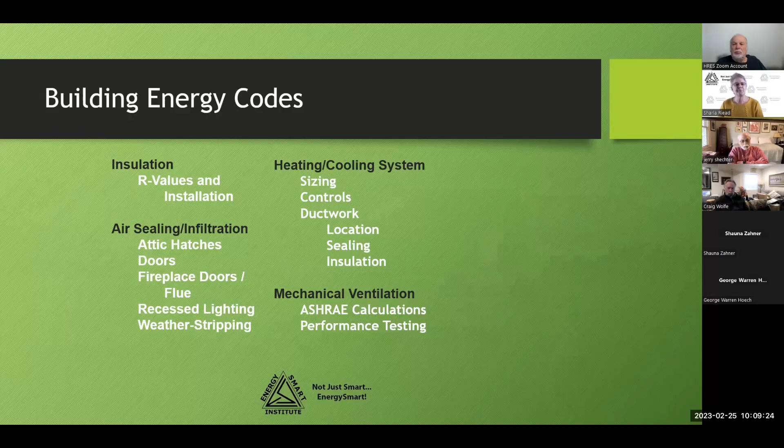The energy code also focuses on the systems: heating, cooling, and ventilation systems, as well as water heating systems. It focuses on lighting, windows, doors and skylights—our fenestrations—and a bunch of other miscellaneous stuff like water pipe insulation, snow melt systems, pools, sunrooms. Anything that uses energy or loses energy is going to be in the energy codes.

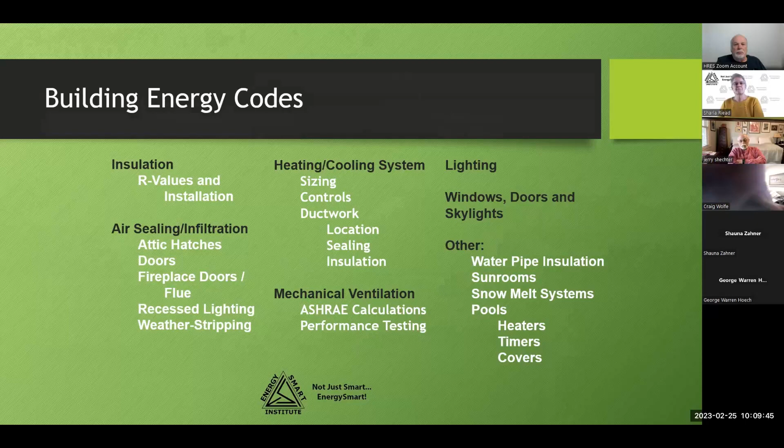So there are what are called paths to code compliance. Our first question that we ask is, does the project even have to comply with the energy code? A lot of jurisdictions in Missouri, and actually around the country, did not have energy codes for a long time.

They just wrote those out of the codes and didn't pay attention to them. But during the Obama administration, any jurisdiction that accepted ARRA funds, the American Recovery and Reinvestment Act funds, part of the requirements of accepting those funds was to adopt an energy code. So now a lot of places have adopted energy codes that didn't used to have them. So now we say, yes, most of our projects in the state of Missouri do have to comply with the energy code, and definitely in the Kansas City area.

And then we have a path called a prescriptive path that you see there on the left. And that's basically, you get a bunch of tables in the code that say, here's your minimums that you have to meet. And it's either a pass fail. You meet it or you don't meet it. You meet this R value or you don't meet it.

And then there's another path called the performance path, which has historically been listed in the International Energy Conservation Code, the IECC. And that's where a builder can prove that they are saving just as much energy on their walls and windows and attic and floors as they would if they followed the prescriptive path by showing how much it would cost. They'd have to simulate the performance using a computer and show how much the energy costs are. And if they're lower than the prescriptive path, then it's deemed as in compliance. So they document that compliance to get their plan review. And then there's testing and inspections that happen before they get their final certificate of occupancy to make sure that they do that.

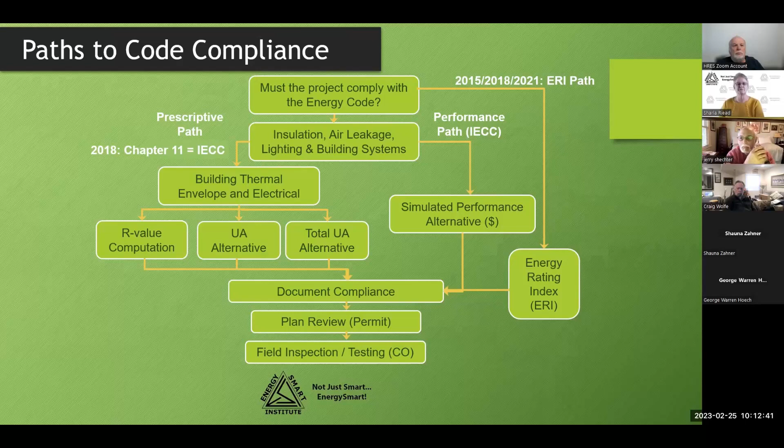So basically, your prescriptive path means that you meet all the minimum required levels, that you have followed those tables and you have met those requirements. In the performance path, you get credit for testing the infiltration, so your air leakage in the house, the duct leakage, and mechanical ventilation efficiency. So if you can offset some of the insulation requirements by having tighter ducts or a tighter house, then you could prove compliance and you got credit for those things.

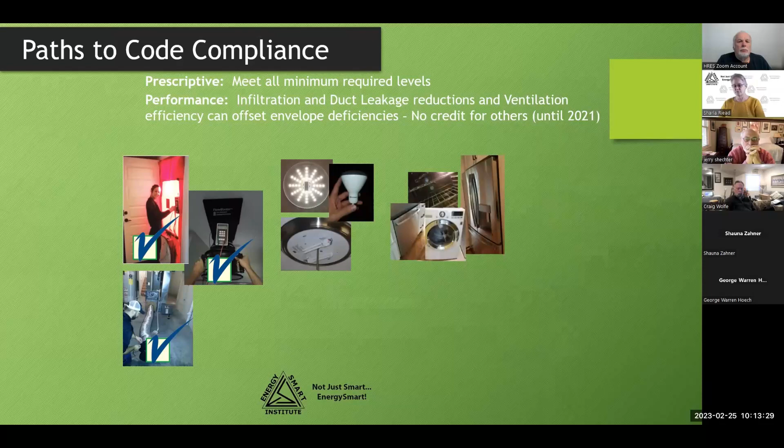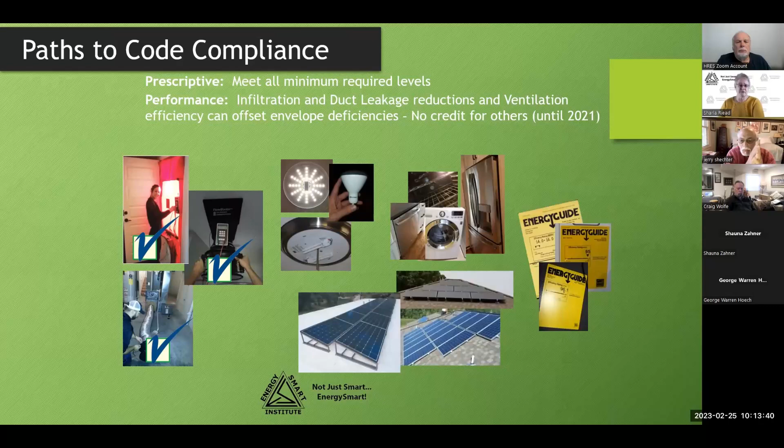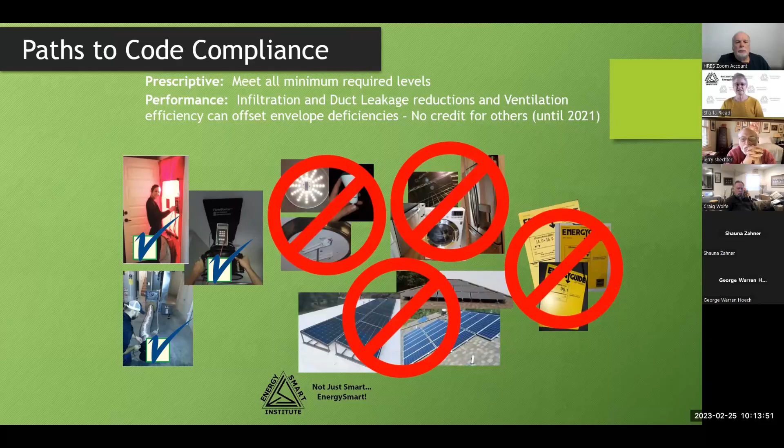But what if the builder put in energy efficient lighting or really energy efficient appliances in the house, or equipment, heating and cooling equipment that's very energy efficient, or solar on the house, which is going to save you some energy dollars because you're going to be generating your own energy. Well, none of that is taken into account in either the prescriptive or the performance path. So that's precisely why the Energy Rating Index path was put in place, because it looks at all of the items in the house as a system. All those interactions are evaluated, and the overall energy usage of the entire structure and all the items in the structure is taken a look at and determined how much energy you're actually using.

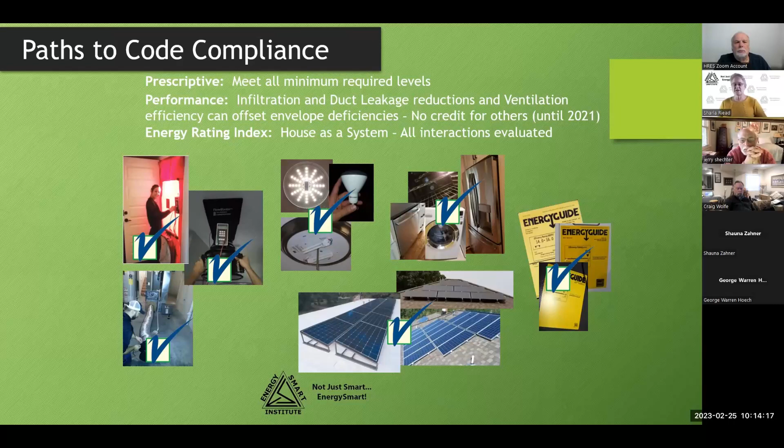So now you can get credit for all of these items. And it was actually a request of the builders to put in a path that gave them credit for what they were doing. So you can see

complying with the energy code, there's lots of ways that it can be done. There's actually, under the prescriptive compliance, there's actually 3 different paths because one of them is you can use your U factor, which is looking at the energy efficiency of an entire assembly rather than just the amount of insulation in it. It takes into account insulation, wood or metal, whatever your studs are made of, the siding, the air film. It takes into account everything.

It's mostly used for windows because it takes into account the windows, any window film, the frame, any spacing in the frame that helps stop heat transfer. And so a U value is the inverse of an R value. It's basically, so it's 1 over R equals U, and 1 over U equals R.

So as your R value goes up and you become more resistant to heat flow, your U value is going to go down. So what we want is a high R value and a low U value. You can actually prove compliance in the codes using either the U value or the R value.

Or the next one is the total UA, which is looking at the U value of the entire envelope, rather than just walls or windows or doors or floors or ceilings. You're looking at the entire envelope and saying altogether all of this meets the requirements.

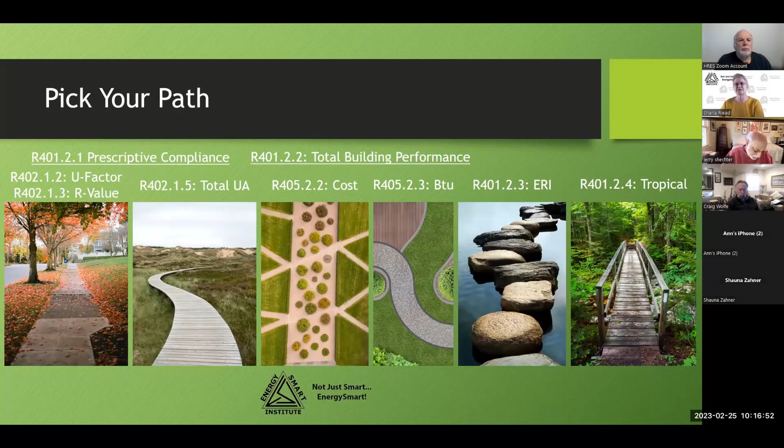Starting in July of this year, there's going to be an enforcement of the 2021 codes, unamended. So that's a big jump. We're probably at about 70% efficiency between the 2009 and 2012 code, and we're going to go down to about 29-30% more efficient. It's a big jump, and it's going to help quite a bit.

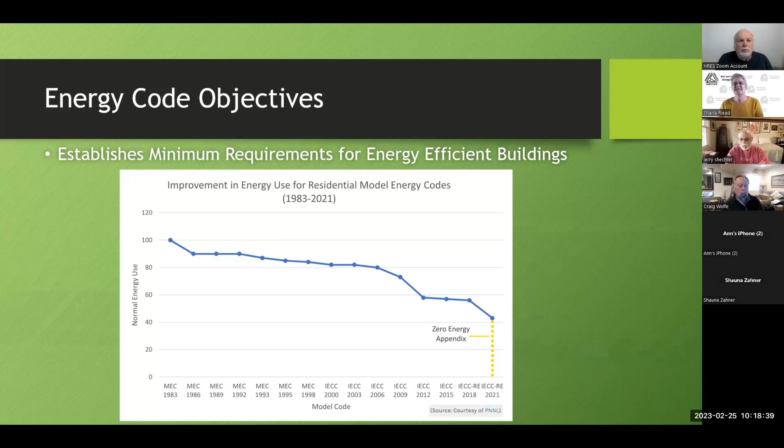So the energy code objectives are obviously to save energy, but there are more objectives that result from energy codes. They do result in healthier buildings because we're having cleaner combustion, better ventilation. The codes require mechanical ventilation, and poorly sealed building envelopes can allow pests, excess moisture, air pollution, and other stressors that can cause or exacerbate health problems. By having a good, tight envelope and an energy efficient building with good mechanical ventilation, you're reducing indoor air pollution and decreasing the incidence of asthma, allergies, lung cancer, COPD, and other illnesses. So energy codes also result in healthier buildings.

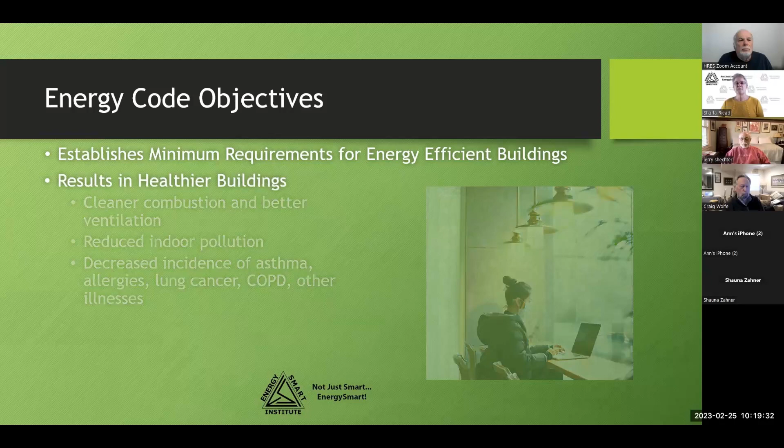They also work on building durability. If you have a good tight envelope that's been verified, then you're going to have less air and moisture intrusion, less pest intrusion. Fire safety is always required in a building, but it gets double checked when you're checking for energy efficiency as well, because the energy verifier is really focused on that envelope. There's been several instances in my experience where I've found places that weren't sealed properly for fire protection, and they had to come back and seal it to make it safe.

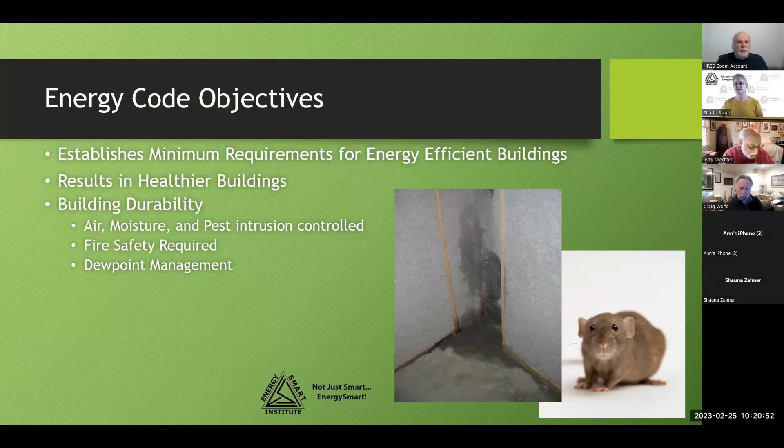With energy efficiency, we strive to manage the dew point, because moisture is the enemy of buildings. Joe Lstiburek, a gentleman who does a lot of energy presentations, likes to say that what we build today are self-composting houses. We allow too much moisture in the house and then it falls apart. So with energy efficiency, we have more durable buildings. There are actually home insurance companies that will provide a lower insurance rate to homes that are verified as more energy efficient. They also focus on building resiliency.

You're going to see a term a lot more often now called passive survivability, because we're seeing a lot more natural events happen, tornadoes and fires and droughts and floods. If a house is well constructed and tight, we can actually survive in the house a lot longer if our energy goes out, or if we lose access to heating and cooling. So it increases passive survivability, the ability to stay in your home even when you don't have active heating and cooling and active energy, electricity.

It lowers the demand on the grid, which you're going to hear a lot more about these days, because we're trying to make it better across the whole country, make it where it's not so prone to being attacked, and where it can handle the increase in demand as people move more toward electric. So lowering the grid demand with an energy efficient house, and lowering exposure to event-driven price spikes.

If your house is very energy efficient, then things like having your utility bills spike, like what happened in Texas where they had the ice storm and then all of a sudden everybody's utility bills went crazy - if you're not using all that energy, you don't have to pay that much for it. So it helps lower that exposure.

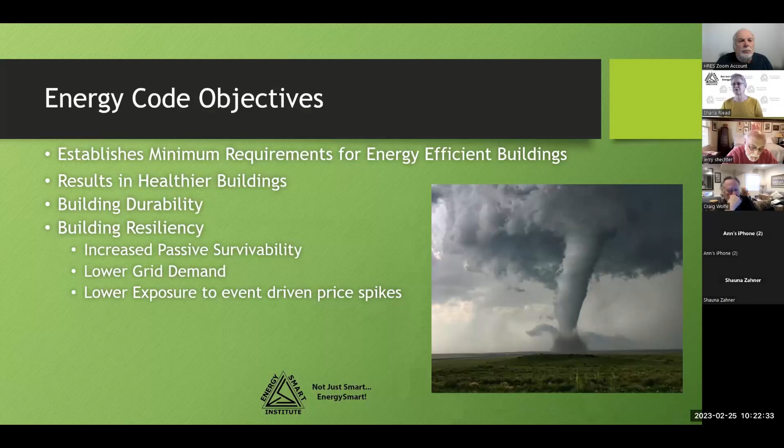One more item here, energy equity. Energy codes are focused also on energy equity. There's been studies that show that each additional dollar invested in energy efficiency avoids more than two dollars on energy supply spending. So saving energy saves money for the people in the house as well as the supply chain portion of it.

It strengthens financial security of families, because studies have also shown that your second highest bill after your mortgage is your utility payments, your energy payments. So if you can lower those energy payments, you can afford a bigger mortgage, or you can actually pay your mortgage because you don't have to spend so much on your energy bills. It also helps with healthcare costs because the houses are more healthy.

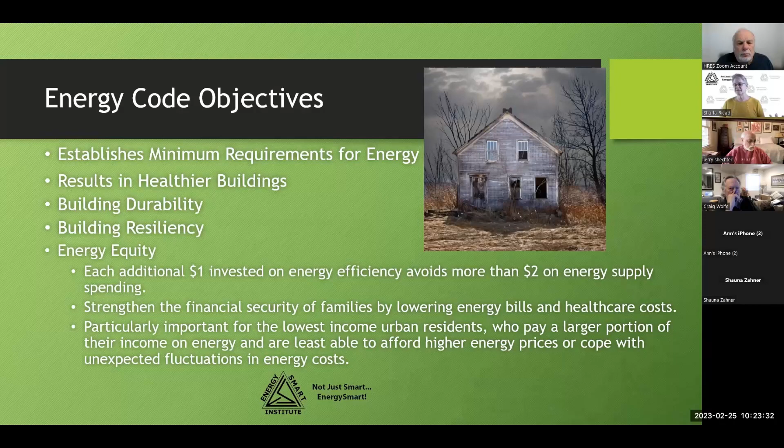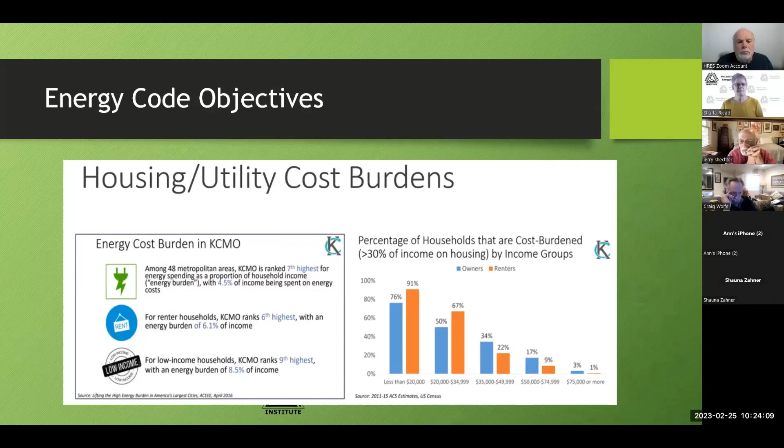So what is the new Kansas City, Missouri Energy Code? Well, as I said, Kansas City, Missouri has adopted the 2021 IECC, the latest and greatest energy code. What this means is that there are increases in R values expected, or decreases in U values, which we talked about before.

There's also a requirement now in the new code that the R value mark has to be readily observable, or the insulator has to provide a certificate. You would think that that'd be something they'd already do, but it was found that it needed to be put in the codes because there's a lot of blown insulation, and the insulators are not standing behind the R value of the insulation they're blowing in.

Now they have to provide a certificate that says, here's how much R value I put in. There's been a new definition for what is air impermeable insulation, because a lot of insulations were claiming to be air barriers as well as insulation. Now that's been scientifically determined and added into the codes - what actually constitutes an air barrier versus insulation, and what insulation can be considered an air barrier.

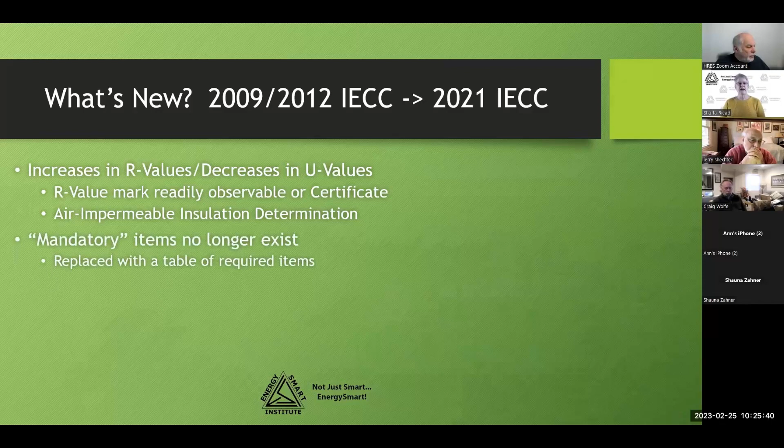The old codes had a term called mandatory, and for mandatory items, every path - we talked about those different paths - each path that was taken had to follow all the mandatory items, even if they weren't following a prescriptive path, they were following a performance path, there was still items in the prescriptive path that were required to be done. However, it was confusing for some people. They didn't go backwards and look at all those items. So a lot of the mandatory items were being missed and not actually being implemented.

So now in the codes, they simplified it by just making a table of required items at the beginning of each of these path descriptions that says, if you're following this path, you must complete these items. So the mandatory items are still there, but there's going to be a much higher probability that they will all be completed.

There are additional energy efficiency requirements for all of those paths. They've also included solar ready and zero energy provisions in an appendix. I'm going to go over those, and I know that's of most interest to this group.

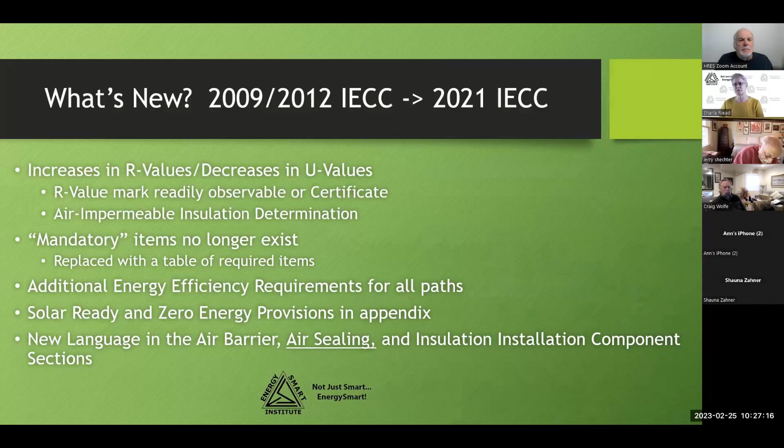There's new language in the air barrier, air sealing, and insulation installation component sections. There was a lot of focus before on insulation values, but not a lot on air sealing and what needed to be air sealed. Now there's more focus on that, because it's highly important for your home to function correctly that it be air sealed as well as properly insulated.

The maximum air leakage rate is now put in place for all compliance paths. As I said before, you got credit for air infiltration on the performance and ERI paths, but when those were measured, there was no requirement for how tight the envelope had to be. It is what it is, and it fits into the formula of how much energy you're using. But now in the 2021 code, you can't go more than 5 air changes per hour, no matter what path you use—you can't have a really leaky house.

The ducts have to be tested as well to see how leaky your ducts are, regardless of what location they're in. There used to be an exception if all the ducts were inside the envelope, inside the house, but now they have to be tested no matter where they are.

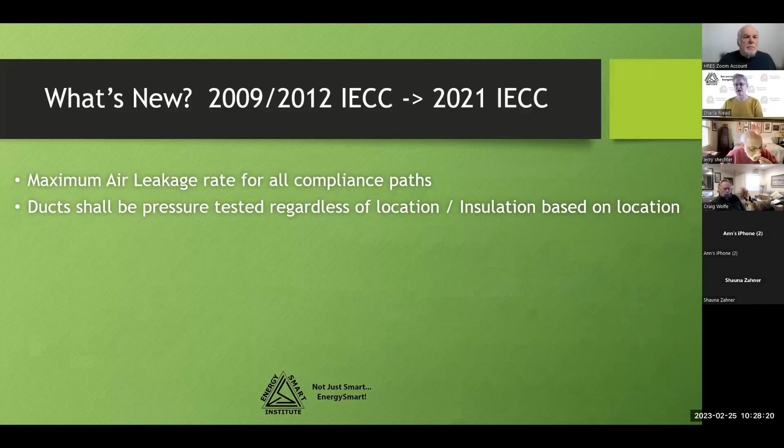Insulation for ducts changed based on which location they're in. There are eave baffle requirements in the attic to keep insulation in place on the edges, and there are attic hatch design requirements, which weren't in there before.

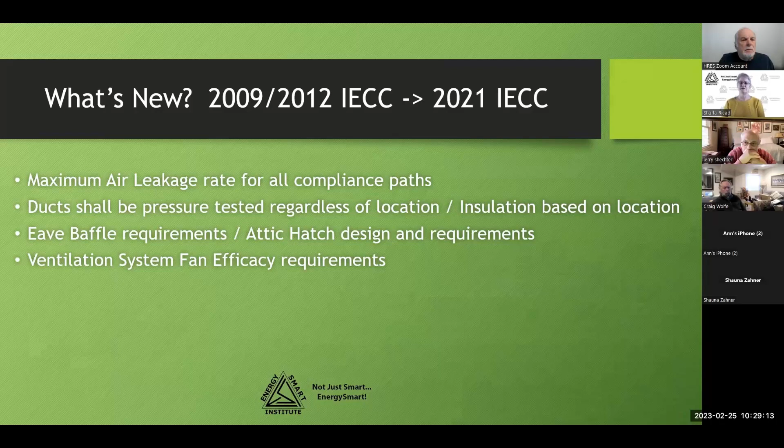Ventilation system fan efficacy requirements: when mechanical ventilation was written into the code, back in 2009 or 2012, it was required for all paths. A lot of ingenuity went into deciding how to incorporate mechanical ventilation into our homes, and some of those methods ended up using fans that used a lot of energy, really impacting the energy use of the building. So now ventilation system fans have requirements for how efficient they have to be.

Lighting has changed too. They changed the definition of lighting efficacy because now, instead of just incandescent and compact fluorescent lights, we have LED lights—more and more efficient lights. So they changed the definition of lighting efficacy and are requiring 100% high efficacy lights be put in, as well as some controls. We'll get into a little more detail on that.

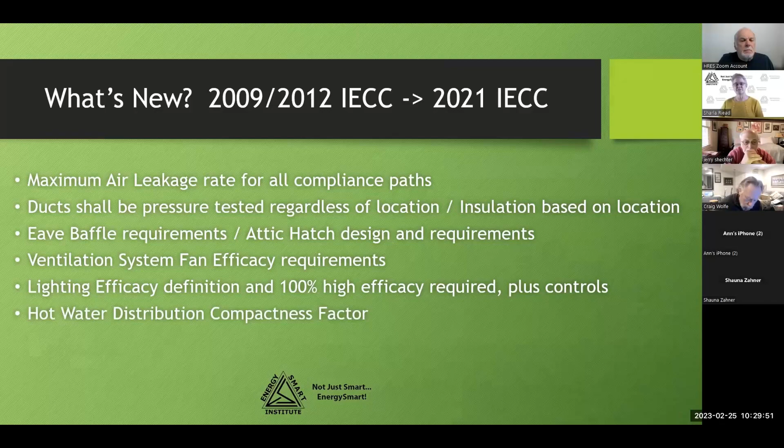There's also a new hot water distribution compactness factor. I'll show you some more about that too. So what are these changes?

This is the U factor and R value changes for our region. You can see in the green parentheses what's in the code today in Kansas City, Missouri—that's what's required right now. The black numbers are what's coming in 2021. If there is no green, then they didn't change for 2021; it's the same as it was.

One of the biggies here: the ceiling R value. Currently we require R49 in the Kansas City area. It's going up to R60.

Wood frame walls currently require R13. That's increasing to require R20 continuous, or R13 in the cavity plus R10 continuous, or R30 in the cavity, or R20 plus R5 continuous.

These are all prescriptive path items, so this is just that one path. If a builder wants to follow one of the other paths—the performance path or the ERI path—they can continue to put in R13 walls, as long as they can prove they're saving enough energy somewhere else to make up for that. So it's only a requirement under the prescriptive path.

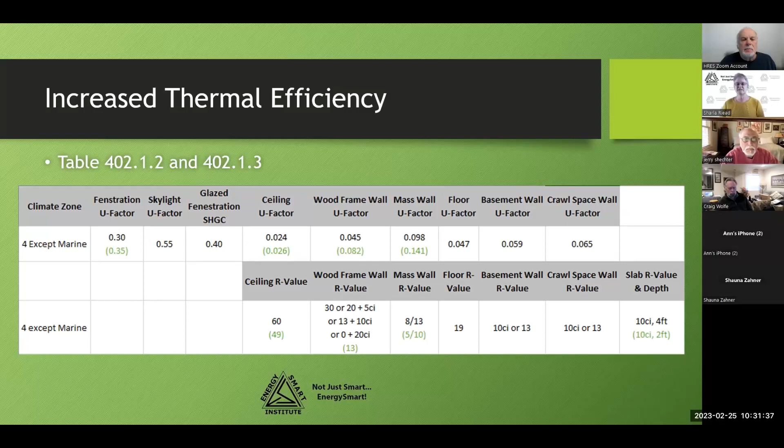Our mass wall R values—your concrete walls, your foundation walls—changed a little bit, increased slightly. And the slab insulation depth: they added 2 more feet to the slab insulation depth, because you can lose a lot of heat out of your slab if it's not insulated deep enough or under far enough. So obviously, increased thermal efficiency.

The big one that builders are complaining about is the R49 to R60 insulation in the attic. Now, the code does say you can have R49 in the attic, and that qualifies as long as it is full height and goes all the way over the top plates at the eaves.

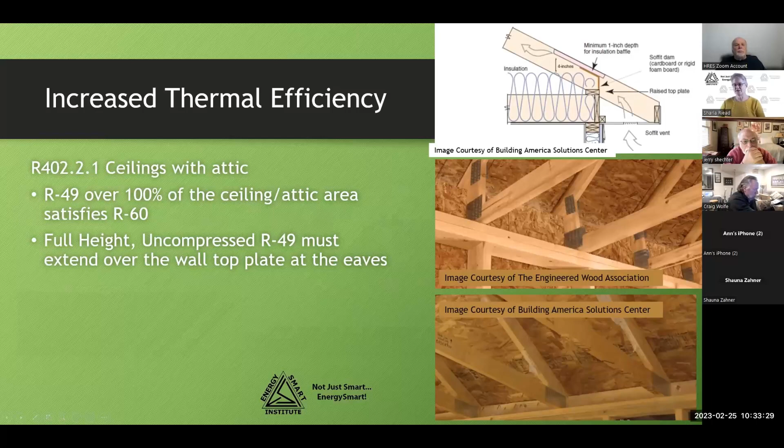So what the code is trying to promote is this kind of wall, called a raised heel truss. Instead of that little point coming all the way down, the roof has been raised up a little and blocking's been put in. So now that R49 insulation can extend all the way out over the outside edge of your wall, and we can still do R49 — it just has to extend all the way out to the outside of the structure.

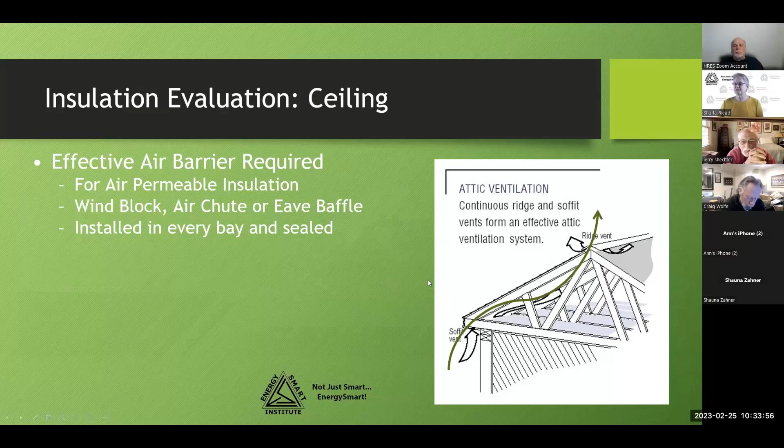Now, the other thing that has raised a lot of concern is having an effective air barrier in the attic, which is a wind block or air chute or eave baffle installed in every bay and sealed. You can see here the air coming in, going up over the insulation and out the ridge vent. It needs to be in every bay and sealed because of a phenomena called wind washing.

Wind washing is where the air comes in through the soffit vent and pushes the insulation away from the edge of the house. This is an infrared image showing that phenomena, where the wind has pushed the insulation away. So now there's no insulation in these blue areas.

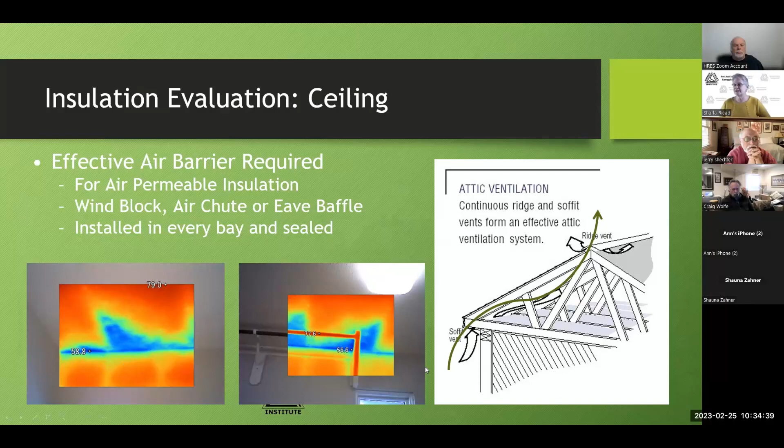This house does not even yet have its certificate of occupancy. That wind washing was done just within a day or two after the insulation was installed. So from the time this house gets purchased, it's not going to have any insulation over the outside edge. That's why this is important.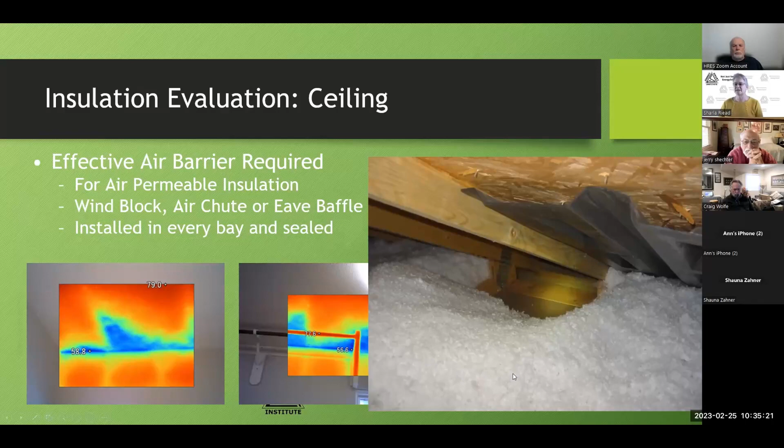The air is coming up and over. However, air is not going to pay attention to that and say, oh, there's a baffle, I have to go that way. It takes the path of least resistance, which is exactly what happened here, as it goes sideways through the soffit and comes out this area where there is no baffle and just pushes the insulation away. That's why you get these marks here.

I've got one more that's interesting. Here's one that pushed the insulation away from a huge area — there was 16 to 18 inches of insulation right here. The next day, this is what it looked like, and you can see all the insulation blew over to the side, filling it up all over on the side and behind it.

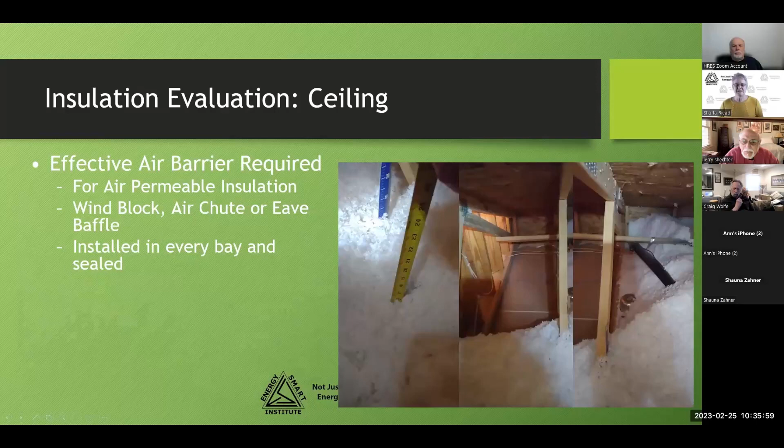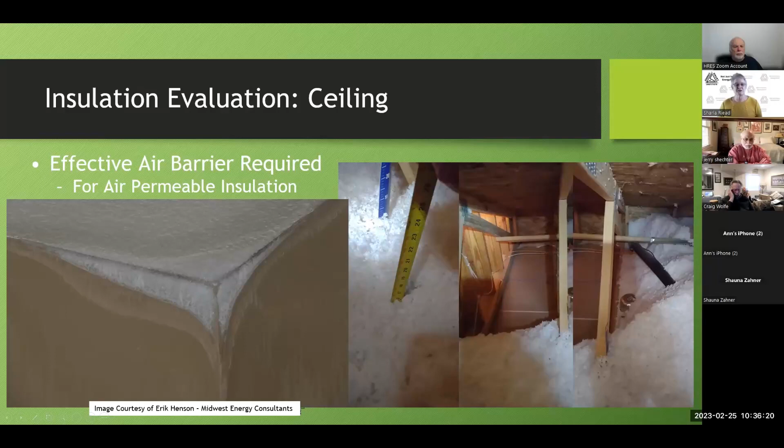So the insulators came back and said, okay, we'll just add more insulation. They added more, and the day after, it was empty again. So we really have to block the insulation from being blown away. Otherwise, on the inside, here's what you can end up expecting. This is a house in Kansas City that had wind washing, ending up with ice and moisture coming down in the corner where the insulation had blown away from the wall. So there's a building durability issue for you right there.

Okay, the air sealing in the new codes includes air sealing rim joists, which wasn't there before, slab foundations. We have to air seal all of these areas, the shafts, penetrations, and shafts and penetrations.

There's added insulation requirements. Narrow cavities are now being addressed in the codes, which they weren't before, so that we're air sealing these cavities. It used to just be that the insulators would poke a bunch of air impermeable or air permeable insulation into those cavities, which did not seal them and did not insulate them very well.

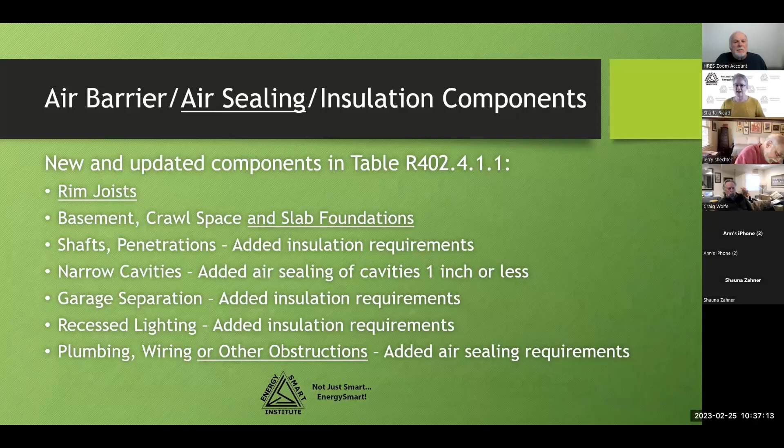Any garage separation, recessed lighting, and then plumbing, wiring, and other obstructions, air sealing requirements were added. And that's because of this phenomenon where we have interior walls that are leaking a bunch of air from the attic. These were taken just a couple days ago.

This is air coming down through that top plate, and here's the hallway, the interior hallway. All this cold air from the attic coming in through holes for plumbing and wiring and shafts and penetrations that are in the inside walls. Your inside walls become outside walls if they're connected to the attic with holes and penetrations. So those all have to be air sealed.

The new code has much more definition and requirements on air sealing to make sure this kind of thing doesn't happen. In this one, you can see the wall is 45 degrees up here at the top, and it's 60 degrees down below. The house temperature is set to 70 something, so those people are very uncomfortable because their walls are all cold.

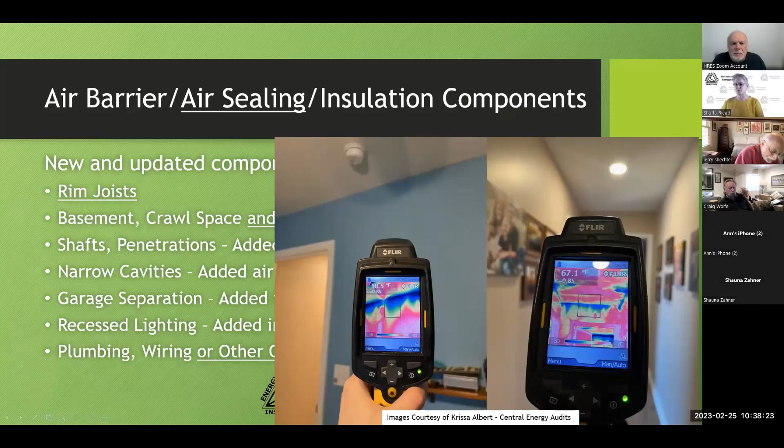Air leakage updated itself a little bit so that there's a maximum air leakage of 5 air changes per hour, but also added some additional ways of calculating the air leakage that's allowed, and provided exceptions for attached buildings because they have sides or tops and bottoms that are against conditioned space, or smaller buildings, because there was some inequity in the amount of air leakage that was truly required or truly allowed in large buildings versus small buildings with the calculations. So there was some of those added.

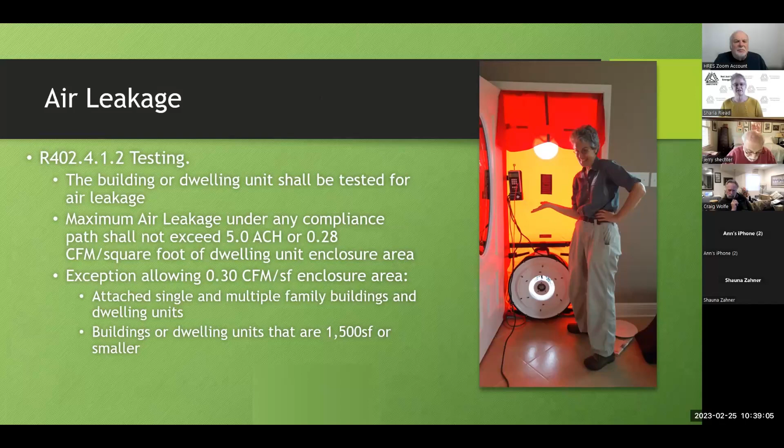The prescriptive path requires an air changes per hour of 3 or less in our climate zone. The other paths can go up to 5, but 3 or less on the prescriptive path.

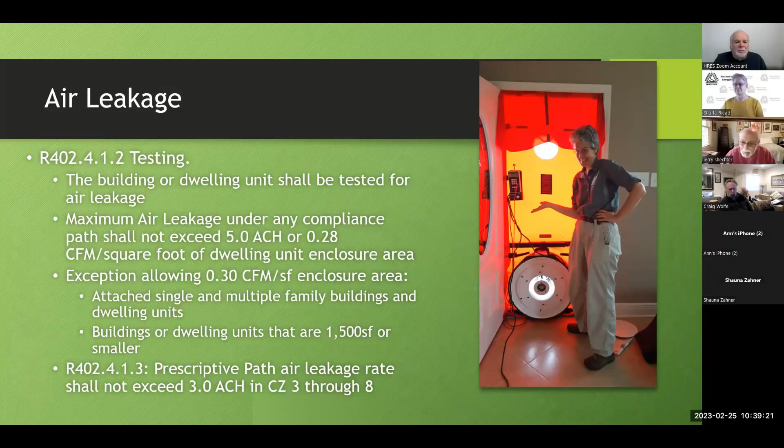Ducts. There's more definition for ducts and where they need to be insulated. Any ducts outside conditioned space, the insulation moved from R6 to R8 for larger ducts and R6 for smaller ducts, and includes all unconditioned spaces, not just attics.

Any ducts located in floor cavities that are over unconditioned space, so that bonus room above the garage, they have to now have a continuous air and thermal barrier on the garage side or on the unconditioned side. Then it has to have a minimum of R19, separating the ducts from unconditioned space.

Because if your ducts get cold in the winter or hot in the summer, now that air that's supposed to be conditioned running through them is cooling down in the wintertime or heating up in the summertime, and you're losing all that good conditioning that you had.

Any ductwork in exterior walls also has requirements now to have at least R10, separating it from the unconditioned space. The remainder of the cavity must be fully insulated, and it must have a continuous air thermal barrier on the unconditioned side.

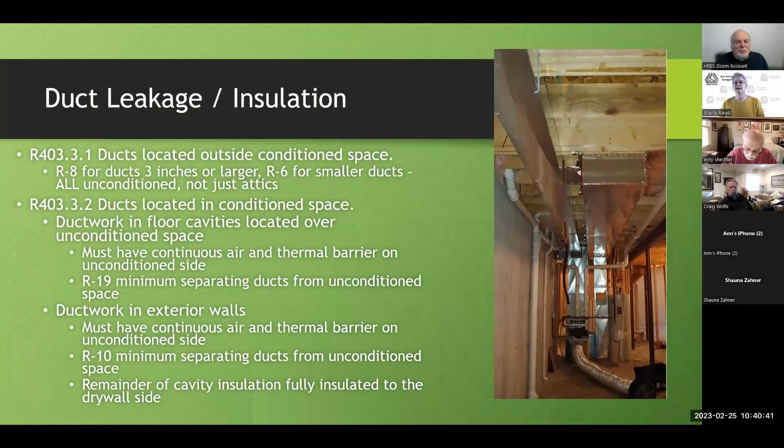Ducts have to be tested for leakage. There's no more exception for ducts or air handlers that are fully within the building envelope. The test has to be written and signed and provided to the code official. Now there's several categories of duct leakage allowed depending on when the test is performed and where the ducts are located. There is an allowance for a higher level of duct leakage if all the ducts and the air handler are entirely within the building thermal envelope and no building cavities have been used as ductwork.

As building cavities used as ductwork tend to leak like crazy. They're very hard to seal. All the parts of it are made of different materials that expand and contract at different rates, and so they don't stay sealed over time.

So this is trying to promote the use of hard ductwork all in conditioned space. We have lots of methods of doing that now. It's just inertia that's keeping us from actually doing these things, because everybody's used to building them and putting the ducts in the attic or in a crawl space or under the slab instead of in the conditioned space.

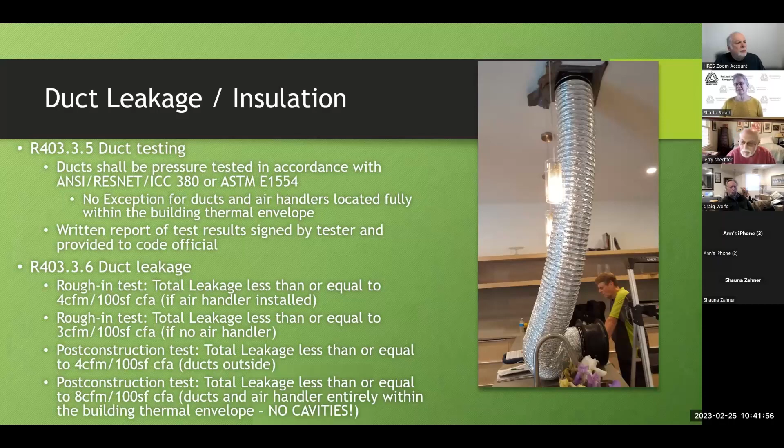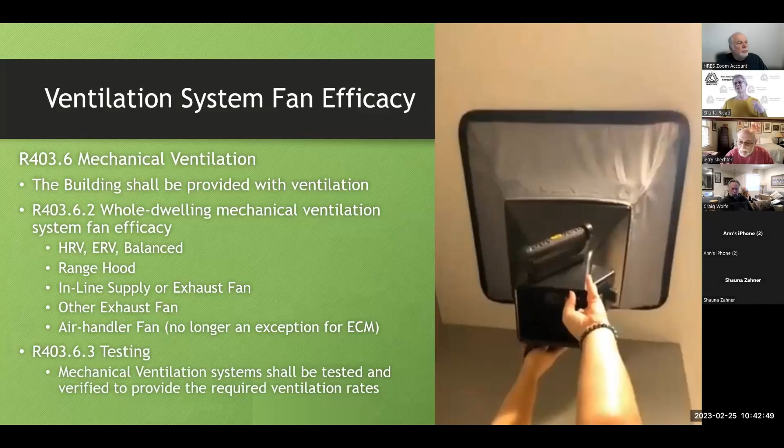There's not an exception for an electronically commutated motor anymore, which was one exception for the air handler fan. But now there's just straight efficiency requirements for those fans. And all mechanical systems have to be tested to make sure that we're actually getting that ventilation airflow that you're supposed to have, that good fresh air in your house.

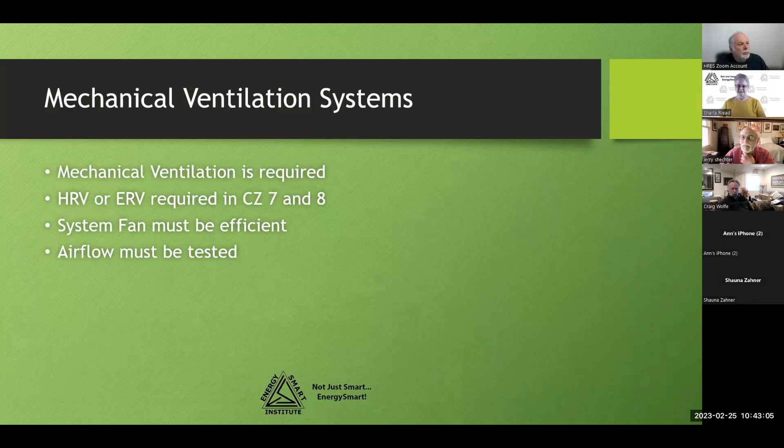Ventilation systems are required. The code actually went so far this time around to require HRVs or ERVs in climate zone 7 and 8. The system fan has to be efficient and the airflow has to be tested.

Best practice for our climate zone, which is 4 and 5 - 7 and 8 are up and far north as you can go, we're in 4 and 5. Actually, Kansas City's in climate zone 4, and 5 is the far north area of Missouri.

An HRV is a good choice for our climate zone because we have dry winters and humid summers, and an HRV will help transfer the heat content of the air so that your exhausting warm air in the wintertime is warming up the cold, dry air that's coming in, and the exhausting cold air in the summertime is cooling down the hot air that's coming in.

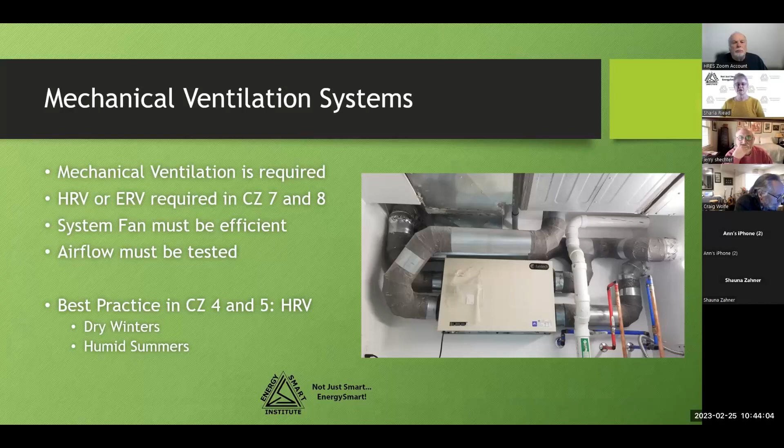An ERV will also transfer that moisture, so it will actually add some humidity in the winter and remove humidity in the summer. So an HRV or an ERV are good choices, but an HRV works fine in our climate.

There's also some changes to the water heating systems. There are so many different water heating systems in use in a house anymore that the codes had to update, and some of the main things they're seeing is that a lot of our homeowners are putting in

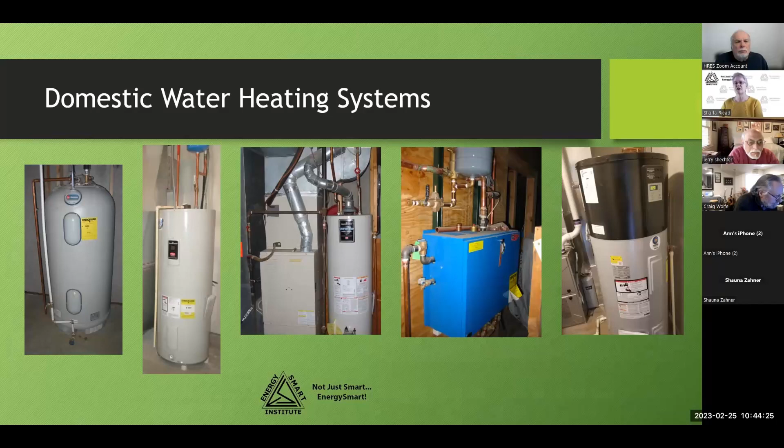water systems that have circulation pumps in them so that they can have hot water when they want it, where they want it. A lot of the circulation pumps was a commercial thing used in hotels, to make sure that all guests have hot water right away when they want it. They don't have to wait for, if they're up on the 8th floor, the hot water to come up from the basement. So now we're seeing a lot more of those in residential buildings.

So the code requires that you have a pump with controls that can stop the circulation when it reaches temperature, so we're not just wasting energy circulating hot water. It has to control the water temperature, there has to be automatic controls. If there's automatic controls, then they have to be accessible. And if they're manual, they have to be readily accessible.

So accessible means you can get to it with a ladder, or there's some way to reach it, but it might take a little work. Readily accessible means you shouldn't have to have a ladder or anything, just open a cabinet and there's your controls. So if it's manual, it has to be readily accessible so you can turn it on and turn it off very easily.

Pipe insulation is now required in the new energy codes, has to be R3 or greater for water pipes. Domestic water,

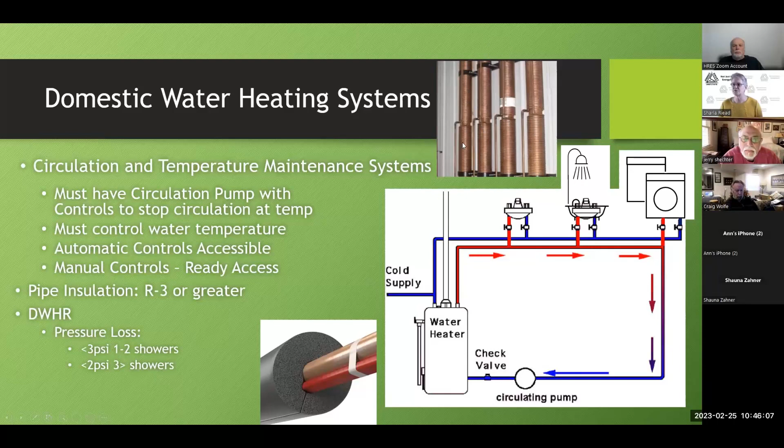DWHR system, which is a domestic water heat recovery system, is what we're seeing up here in this top picture, where we've got coils wrapped around the pipes that are going down. And this one is an apartment complex, so there's 4 in a row, but the pipes coming out, these are drain pipes from showers, from sinks. So we're draining out hot water, usually from showers that we know we're going to have hot water.

And the incoming water has copper that's coiled around the drain pipe. So basically, as the incoming water comes in, it's taking the heat off of the drain pipe for the showers and warming up for free before it hits the water heater. So we're warming that up.

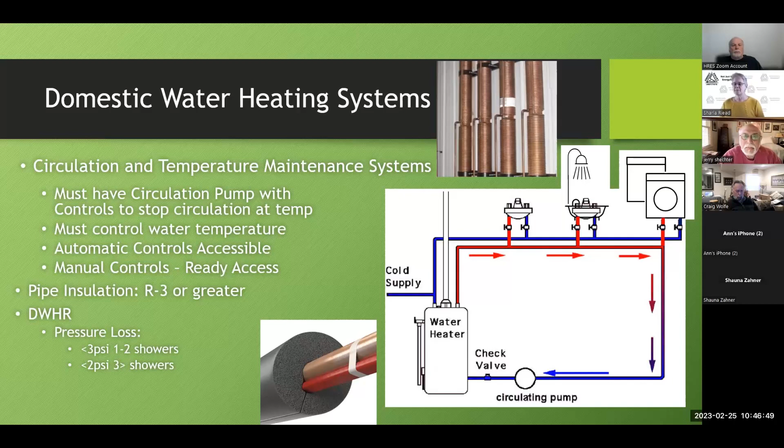So there were some items added in the codes to make sure that we're not causing major pressure losses in the house by adding all this extra length of copper. So their pressure loss requirements are down here.

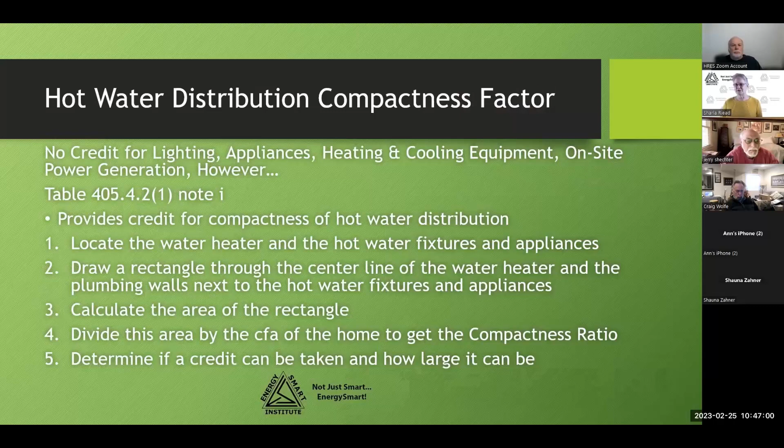All right, and then there's this new hot water distribution compactness factor, which is actually for the prescriptive path, and it looks like this. It's trying to have builders think more about where the water heater is in connection with where the hot water using appliances are, so we can limit the amount of pipe the water has to go through before it hits the hot water using appliance.

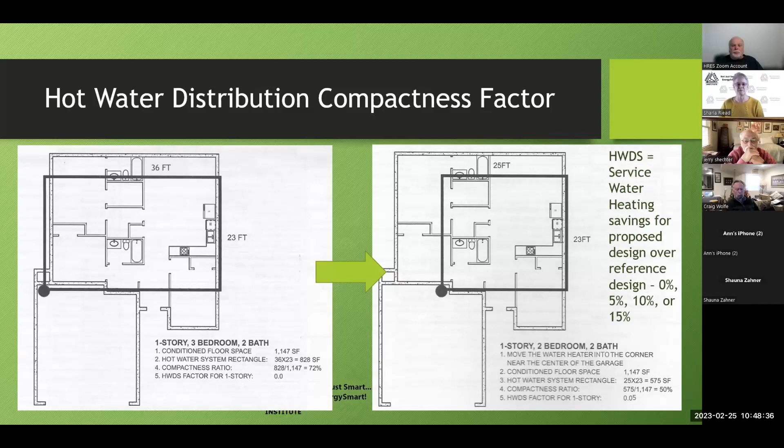Which actually provides a 5% savings on the energy used for heating water. The energy savings hot water distribution system in the proposed design has allowances in the code for 5%, 10%, even 15% savings of energy for hot water that can be used to lower the energy use in the building and meet the energy codes. So trying to get the hot water generating item, the water heater, close to all the hot water using items so that we don't waste energy piping water all through the house.

Lighting changed. The definition for high efficacy lighting has changed. Our current code in Kansas City is that 75% of all permanently installed light fixtures have to be very high energy efficient. In the 2021 code, that increases to 100%.

It's also included interior lighting controls. Interior lights have to be on dimmers or an occupant sensor in the rooms that are used the most during the day. Some areas do not require the controls, but there are areas where controls are required.

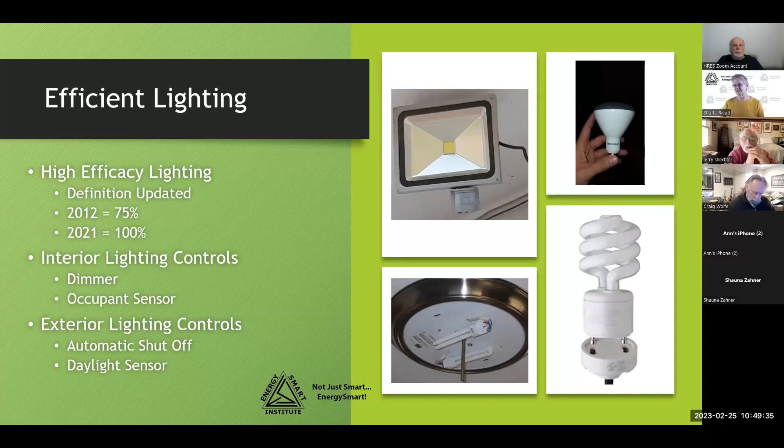Exterior lighting also requires controls to automatically shut off during the day. And during the night, you can have a motion sensor or daylight sensor required on the exterior lighting controls.

Then we have these additional energy packages. Part of the code was to save energy, and there was a request that options be provided for saving this additional 5% we were trying to get in the new codes, so that a builder could choose what option worked best for them rather than having something required that they had to do on every home. So there's additional energy efficiency packages.

The prescriptive path can choose from a list, which I'll share with you. The performance path can choose from that list or just prove they have a 5% reduction in energy costs. And the energy rating index path has to actually have an energy rating index that's 5 points lower than the one that's in the code. So every point is about a 1% savings, and the energy rating index path can prove their 5% by having a 5-point lower ERI.

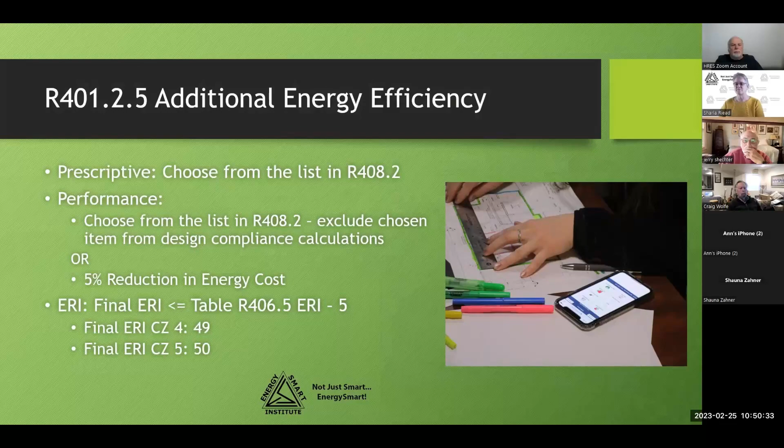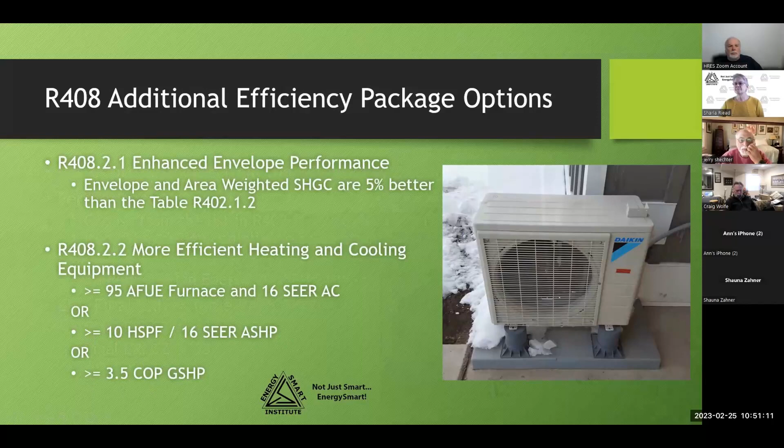So the options are having enhanced envelope performance, meaning the envelope, the insulation and air sealing in the walls, and the area weighted solar heat gain coefficient for the windows, are 5% better than what's provided in the table. Or we can put in more efficient heating and cooling equipment, and this is the list of requirements for that equipment depending on what kind is being put in: a furnace and air conditioner, an air source heat pump, or a ground source heat pump. We can also put in more efficient water heating equipment, and those are the requirements depending on the type of water heating equipment.

The code has recognized that solar water heating is a very good idea. If you have a solar water heating system which provides at least 40% of the hot water, then that counts as your additional energy efficiency package that saves 5% on the energy use of the home. So there's a solar fraction allowed now for solar water heating.

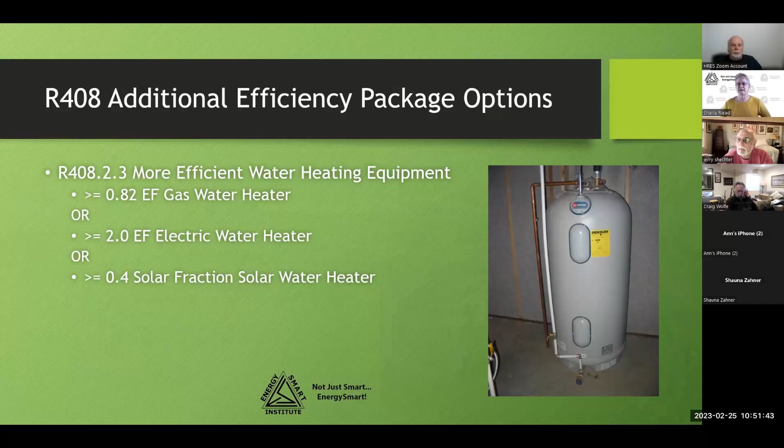You can also prove it with a more efficient thermal distribution duct system, which is putting all the ducts and air handlers entirely in the building thermal envelope, or putting in a system that doesn't require ducts, because those save a lot of energy since you don't have ductwork for them to leak through. Those would be like mini splits or multi-splits, something like that.

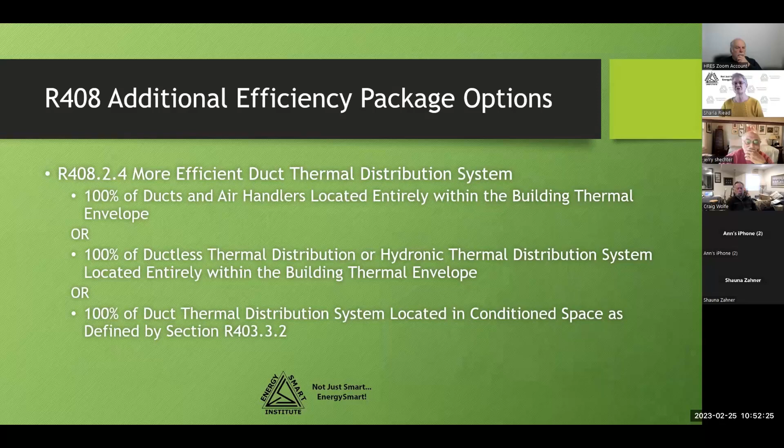Or if 100% of the duct system is located in conditioned space as defined by the new rules in the codes, because sometimes ductwork in the attic can actually be considered in conditioned space, which I will share with you right now. So conditioned space means it's entirely within the continuous air and thermal barrier, or it can be located in a ventilated attic and buried deep enough that it's like it's in conditioned space.

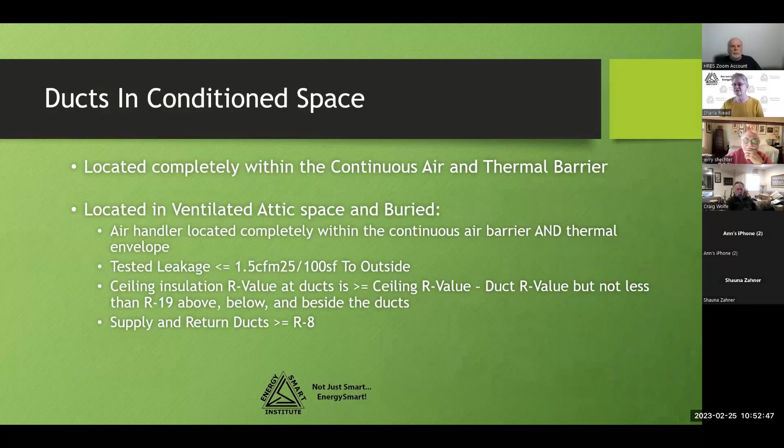These are the requirements. It requires a lot less leakage to the outside, less than or equal to 1.5 CFM at 25 pascals per 100 square feet to the outside, which is about half of what is normally allowed. So if you have about half the duct leakage and you've deeply buried your ducts in insulation with at least R19 above, below, and beside the ducts, and the ducts themselves are insulated, then they can be considered in conditioned space.

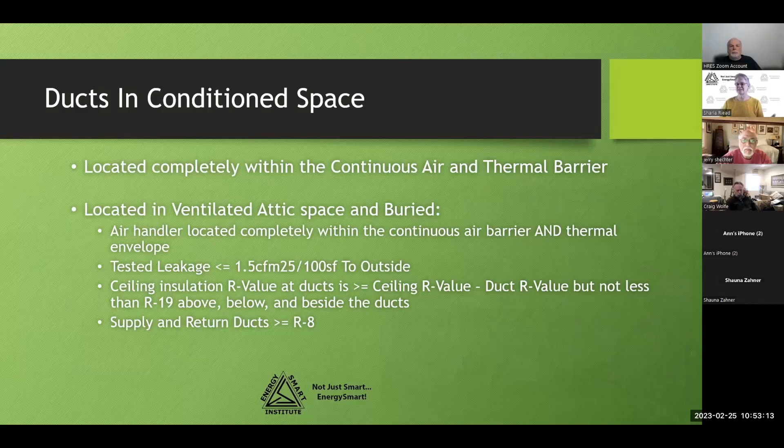You can also provide additional efficiency with improved air sealing and an efficient ventilation system. So you have to have less than or equal to 3 air changes per hour plus an ERV or an HRV that has greater than or equal to 75% sensible recovery efficiency. So basically greater than or equal to 75% of that heat that is leaving the house is being transferred to the incoming airstream. It has to have a very efficient fan.

Can't use recirculation as a defrost strategy. So if the HRV gets frozen, it's not using the inside warm air to defrost it. And if it's an ERV, it also has to have a high latent recovery moisture transfer, which is the humidity transfer of the air. It has to be able to do a good job with that.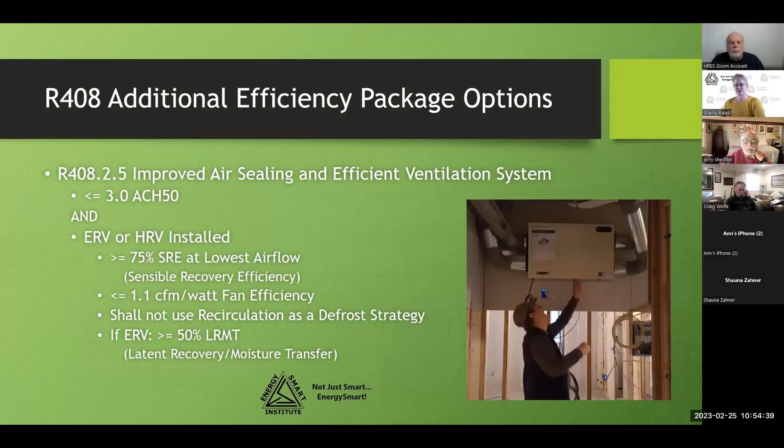All right, so those are the options for a builder to choose to prove that they can save another 5% of energy efficiency in the 2021 code. They have a lot of things to pick from, depending on the house and where it's being built and the design. Some of these will work better than others. They can pick and choose so they can make sure it's efficient, effective, and cost effective for what they're constructing.

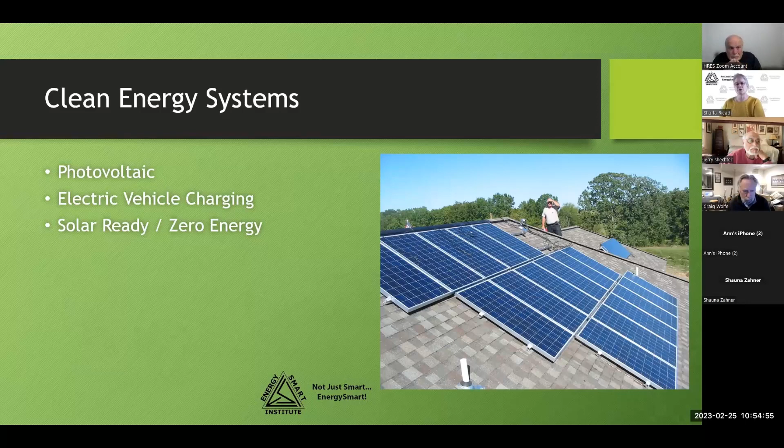Clean energy systems have a much bigger impact in the code now. The codes talk about photovoltaic systems, electric vehicle charging, and there's a solar ready and zero energy ready appendix.

With photovoltaic systems, this is an item that is taken into account on that energy rating index path, the ERI path. The codes state that the RECs, the renewable energy credits, are retained by the homeowner. They're not sold to the solar company or the utility company, they actually go to the homeowner. But photovoltaic impact on the energy efficiency is limited to 5%. So even if it provides more than 5% energy reduction to the house, the max that can be claimed is 5%. And the envelope has to at least meet the 2015 IECC requirements to get that credit of 5% on the PV system.

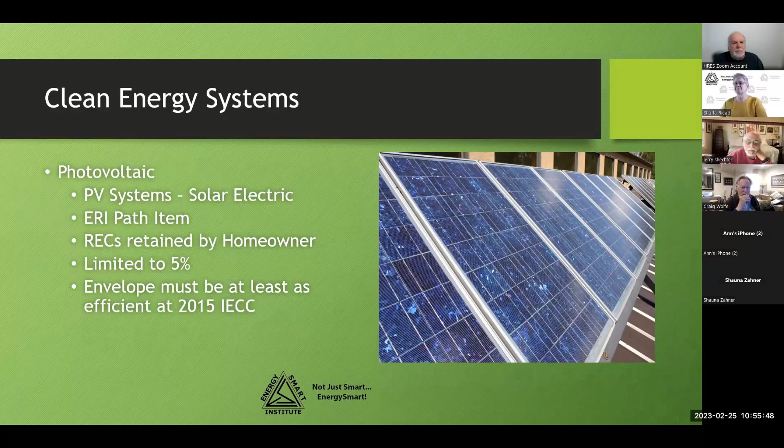Electric vehicle charging stations are also taken into account in that energy rating index path, and they are allowed to not be included in the energy use. So basically it's free energy for the house to charge up the car. You're not being dinged by having extra electricity being used to charge the car. That's being promoted as something that we want to have, we want to have electric vehicle charging stations. So it's not going to cause something else to be more efficient to make up for that electricity.

And then the two appendices, these are optional appendices, RB and RC. Solar ready is one of them, which the appendices can be adopted by a jurisdiction if the jurisdiction wants to. They're not part of the code, they're parts that have been written to be added in if the jurisdiction wants to add them in. So solar ready means that there's roof space that's been reserved for a solar PV system or a solar thermal system. That is the correct orientation to make it work, has to be unshaded, and any roof load that might be had by putting on a system, including the wind load, the point loads, there's a lot of engineering that needs to go in to make sure that the roof can handle a system.

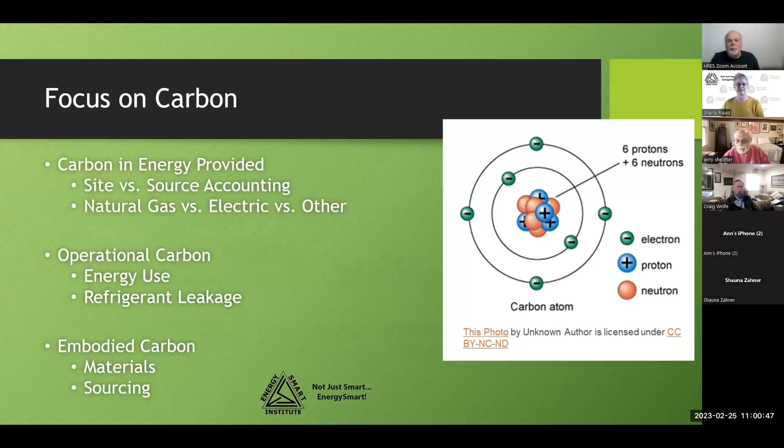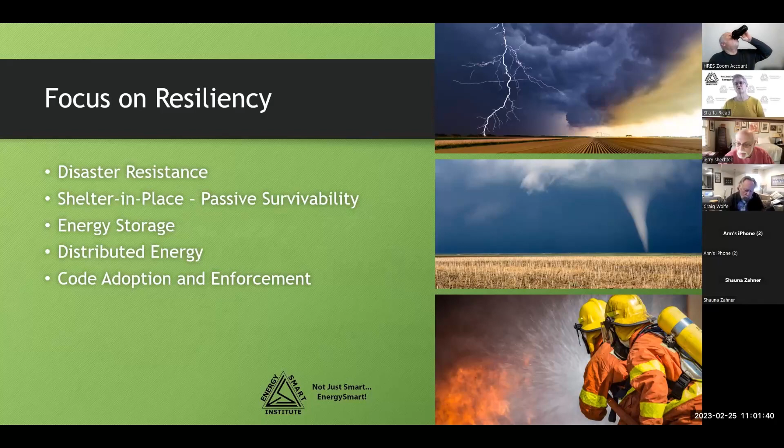And then a focus on code adoption and enforcement—how do we make sure these codes get adopted, and how do we support our code officials in enforcing them? Of course you'll see a focus on energy. They continue to look at fan energy being used. You might see a mandate on duct locations, no longer allowing ducts in an attic, unconditioned basement, or crawl space. Providing credit for energy storage, for EV ready, limiting peak loads in a building. You might see those zero energy and solar ready appendices actually become part of the code in the future.

Probably not in 2024, but coming up, there's a big focus on electrification and making sure that we are ready for electrification of everything.

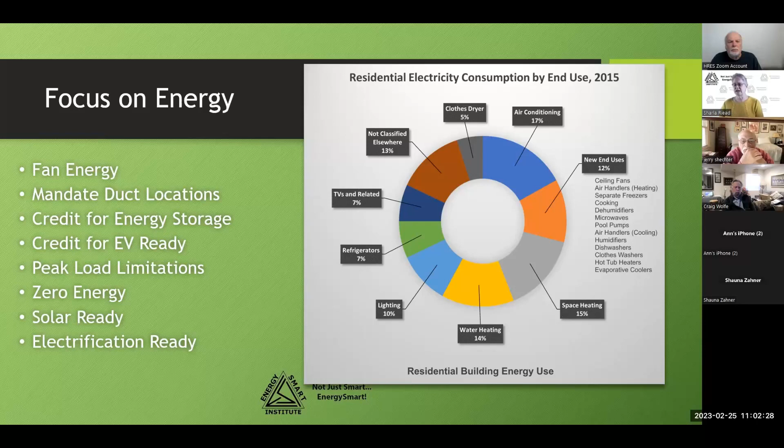Looking at equity—compliance equity, I call it—which is basically the equity between all those paths. We have 7 paths that can be used, 6 in our area, making sure they're leveled out so you're saving the same amount of energy no matter which path you choose. Currently there are some backstops, where you can't go less—you can't have a lower R value than a certain code level. There are some that are seemingly punitive to some of the paths.

There's an issue with the energy rating index path on mechanical ventilation that needs to be fixed—they tried to fix it in the 2021 code but didn't quite make it. It will be fixed in the 2024 code, leveling the stringency requirements of each of the paths.

And then there's a discussion about mechanical equipment efficiency. Right now, and throughout history, the code has said to follow the federal minimum mechanical efficiency requirements. There's talk about whether to keep that as a federal efficiency requirement, or start moving it into the energy code as a place where we look at mechanical system efficiency directly, rather than referring outside the code. So that might be coming into the energy code.

And there's going to be additional efficiency option packages provided to save energy. So that's federal. What's happening in Missouri? What's the future hold for Missouri energy codes?

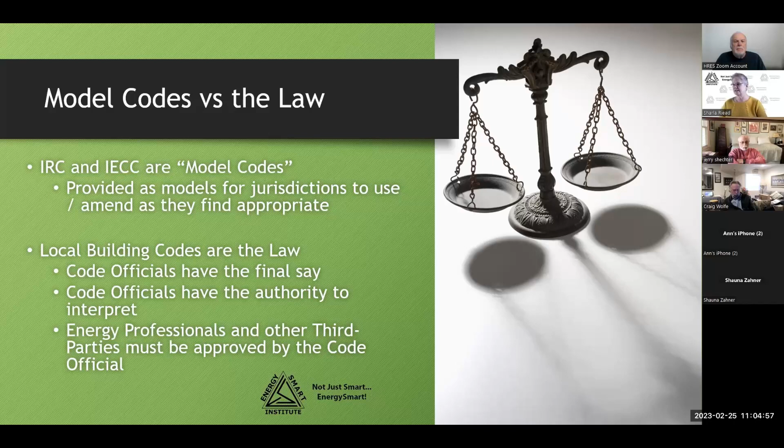So locally, as I said, Kansas City, Missouri has adopted the 2021 IECC with just a couple amendments there. But the state of Missouri has a new House Bill 580, which ignores Missouri's history as a home rule state.

So the term home rule is something that we see in codes across the country, depending on where you are. Missouri is what's called a home rule state, which means we don't have a statewide energy code. What we have is codes per jurisdiction in the state. Each jurisdiction chooses what works best for its area, and the jurisdiction can choose what they want their codes to be.

But the state is now trying to put in this House Bill, which basically has 5 things in it that overrule whatever a local jurisdiction has. It prohibits any codes with wood frame wall cavity insulation greater than R13 be required in the codes. So they want to keep it at R13 for wood frame walls.

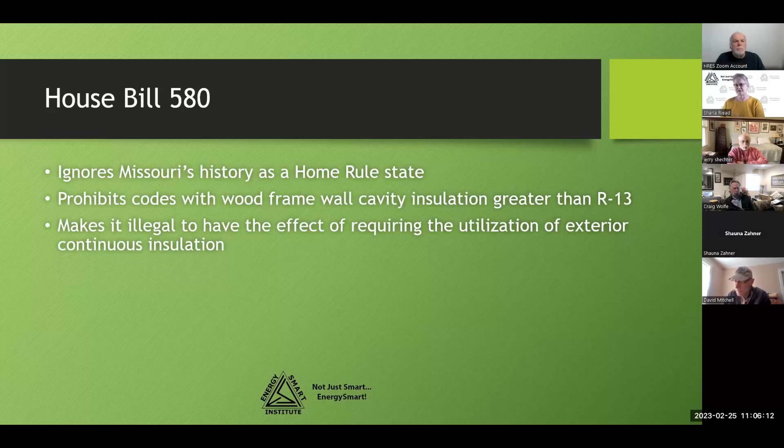It makes it illegal to have the effect of requiring the utilization of exterior continuous insulation. So all of those code items in the prescriptive path that said plus R5 continuous or plus R10 continuous would have to be gone. You can't require continuous insulation.

It outlaws maximum air leakage rates less than 5 air changes per hour. So that prescriptive rate of 3 air changes per hour would be against the law. You'd have to change it to 5. So they want leakier houses, leakier, less insulated houses. It bans the requirement for ceiling insulation greater than R38, which we currently have at R49. So we're already breaking the law if that's the case.

And it requires the use of framed cavities as ducts or plenums be allowed. This is a really bad idea because it's been proven over and over again that using your framing, which is your floor cavities or your wall cavities, as a duct, you have tons of duct leakage.

Not only that, but especially on the return side, what we see in our area is a lot of returns in the basement using floor cavities at the basement ceiling as a duct. Well, those leak a lot. And then right next to there is a water heater and a furnace with flues. So our return air all comes from the basement because our ducts are leaking and sucking all the air out of the basement, which causes negative pressures in the basement and causes those flues to backdraft. Then we have poisonous air coming down into our basement, which is being sucked into our ducts and spread all over our house. So that's a very efficient distribution system for carbon monoxide, which is something we really don't want to be breathing.

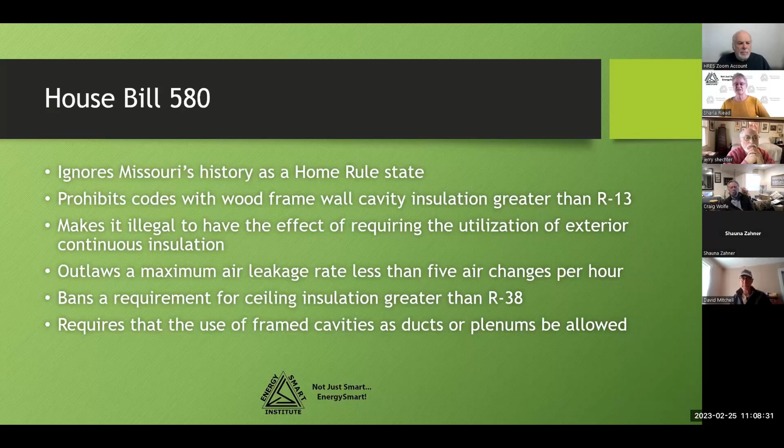Okay, so House Bill 580 was introduced January 4th by Dan Houx, I don't know how to pronounce his name, from District 54. Usually it takes a while to move a bill through and make it into law, but this one is being pushed by somebody because it was immediately referred by January 19th to the Government Efficiency and Downsizing Committee, because that's where you want to go for all this government overreach to be telling the whole state what they can and can't do.

So Government Efficiency and Downsizing got it on January 19th. They held a public hearing on February 1st, which was announced on January 31st. Actually, it was announced, I think, January 28th. They were going to do it on the 29th. They had a whole lot of written testimony and people saying they wanted to be there, so they had to delay it to February 1st.

93% of the public testimony, both verbal and written, is against this House bill. So people don't want it. But the committee went ahead and passed it anyway, 9-3, with one absent and one abstaining. So the committee passed the bill on February 22nd.

On February 23rd, it was referred to the Rules and Legislative Oversight Committee. That committee already had items on their agenda for their next hearing on Monday the 27th, but they went ahead and added this bill to that. They were apparently asked to push it through and get it past this committee. If it passes this committee, my thoughts are that it goes from there to the full House, and if the House passes it, it will become state law.